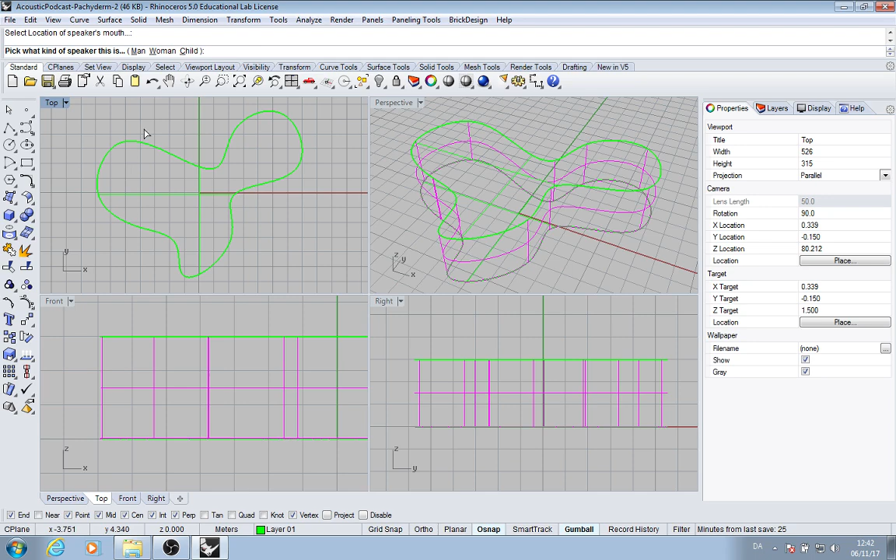So what we will do is again simply write insert in the command line, and instead of just the omnidirectional source we used previously, we will insert a speaking person. We're asked where is the placement of the mouth, and we insert that somewhere into our geometry, into our space. Man, woman, or child - let's say woman. And we can ask for different modes of speaking, or singing, or shouting. We say singing in this case.

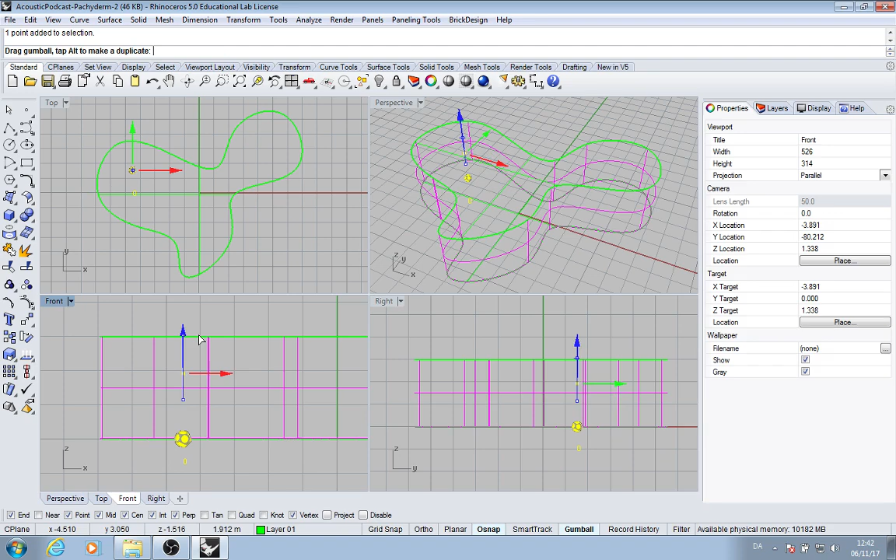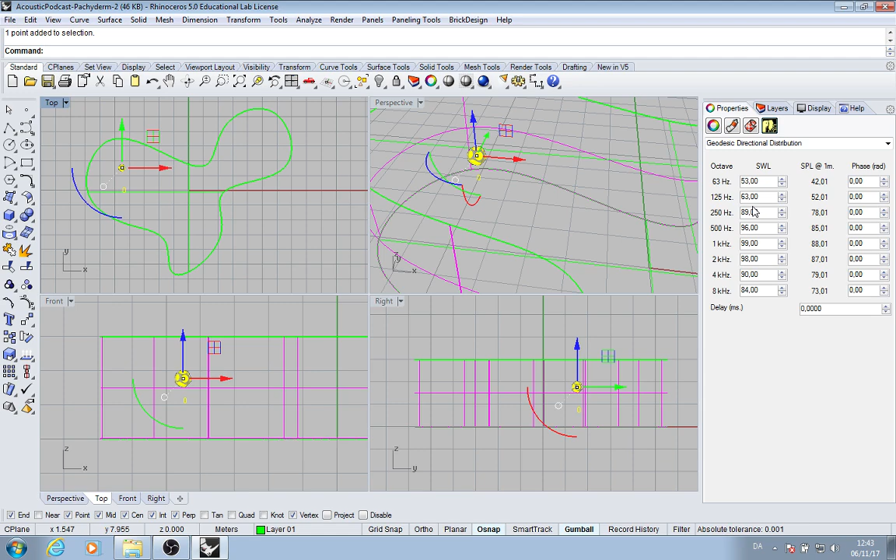Remember to move the position of the mouth to the correct height. When we mark the source now and go to the properties, we will be able to see a differentiated set of values on the sound power level emitted from the source at different frequencies. In the omnidirectional source, you may have noticed the sound power level at all frequencies was 120. Should you have more specified knowledge of your source, you can always edit these to set them to exactly the level that matches the source you're working with.

Then we will insert a receiver, or actually a series of three receivers, and they, as mentioned previously, can be marked, moved, and copied in the same way as points can.

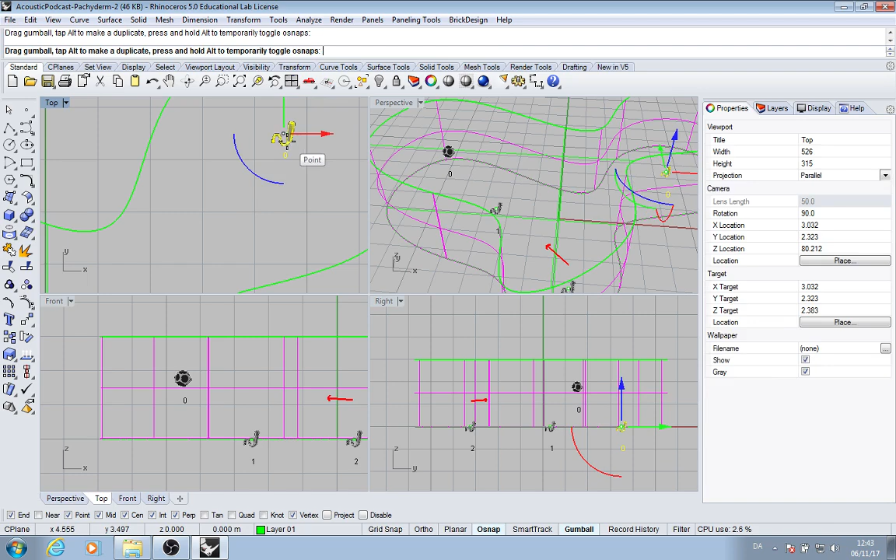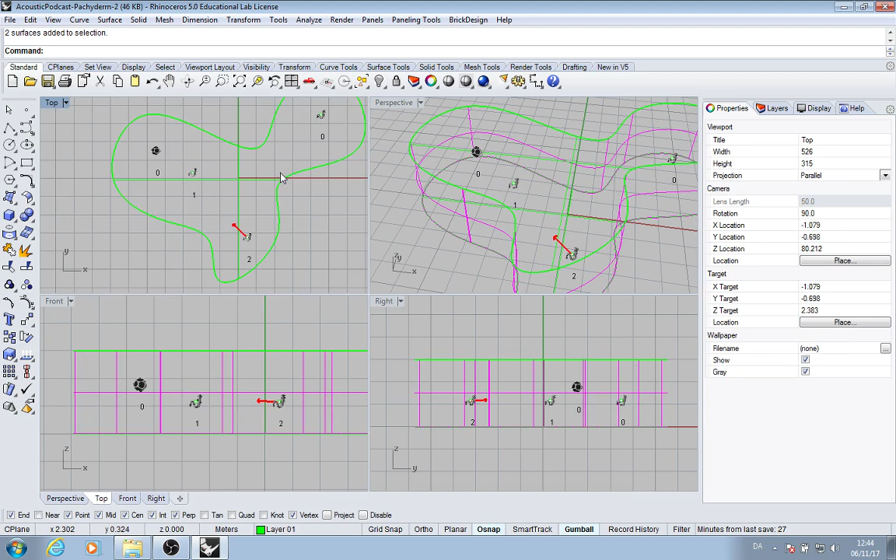So now we have receivers and sources placed in our model. We have checked that it's in meters and that the geometry of your space, your boundary space, is airtight. That means we are now ready to simulate and test the space.

And what we'll do, in order to not spend too much time waiting for the machine to finish the simulation, is a low order with just one reflection order of the image source solution. For the ray tracing solution, we'll keep it at 1000 rays, even though that's too little for the volume of this space. Checking the environmental factors, and then we simulate the acoustics of the space.

Again, we will see up here in the command line that Pachyderm is explaining how far along it is and how long until the simulation is anticipated to finish. It's casting, or calculating, the rays up to the number specified by you.

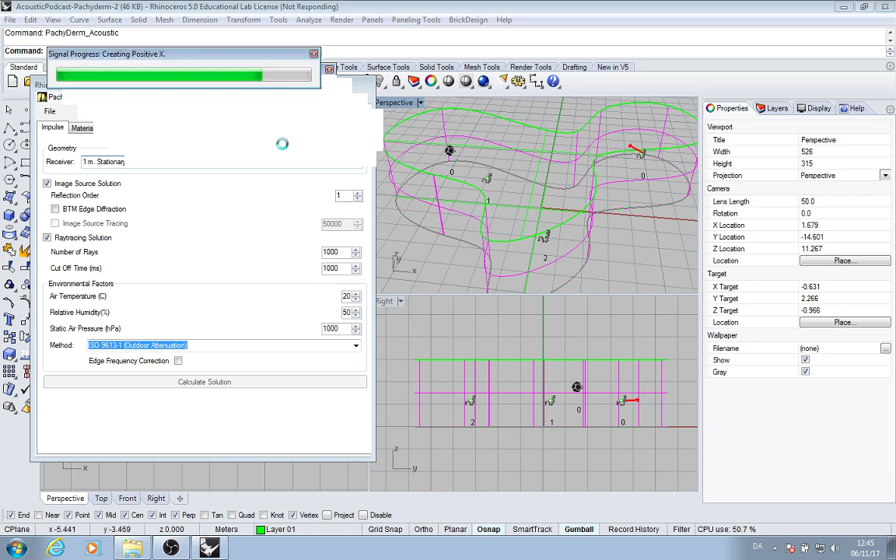And as it has completed here, we now have the possibility to go to the Analysis tab and look at the values that have been computed. What's particularly different from the last example is that on the receivers we now have three different receivers, and when we mark the different ones in the Pachyderm interface, we'll see a marking that shows which receiver has been chosen in your geometry, in your model.

So again here, if you look at reverberation time on T30, we can see that our reverberation time is approximately 0.8, 0.7. Let's just quickly check the different positions - they are closely matched, or close to each other.

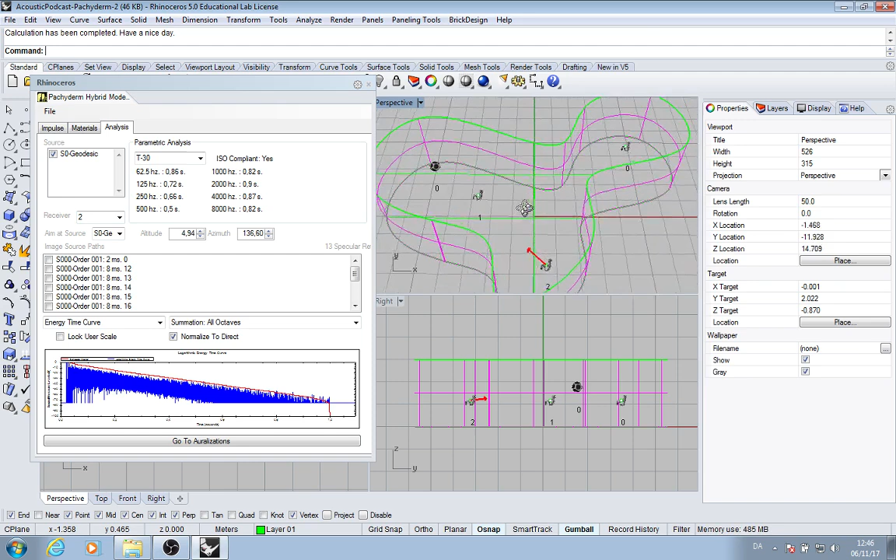That means our cutoff time is not entirely correct, but also not far off compared to the estimated cutoff time, which is based on 75 to 100% of the anticipated reverberation time.

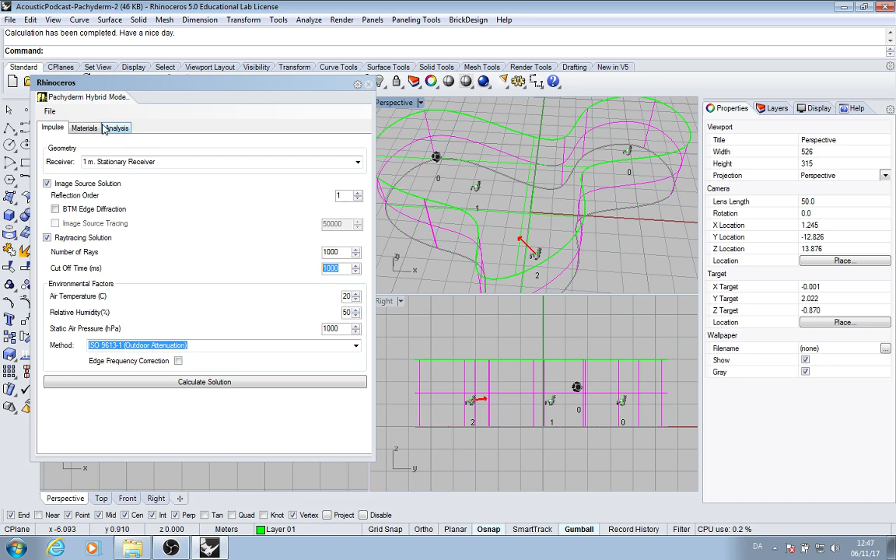Okay, but if you then move into and look, instead of reverberation time, at something like definition - which is basically the percentage ratio relationship between early to total sound energy at these different positions - then we can see...

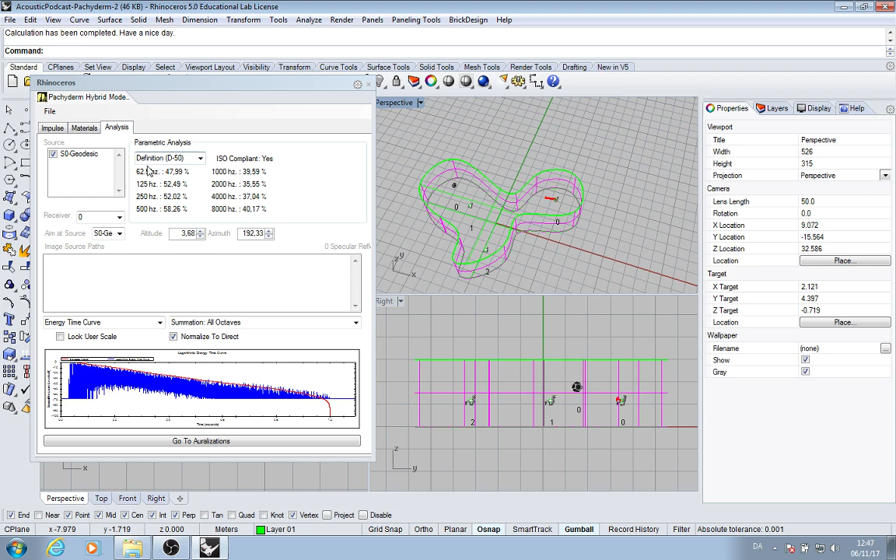In the more isolated space over here, we have a percentage which is relatively low. Normally we're interested in a percentage that goes at least above 50%, meaning we have a higher early to total sound energy ratio at this position, in these positions. In this case, we have too low a value in terms of assessing the space for speaking conditions, or for speech.

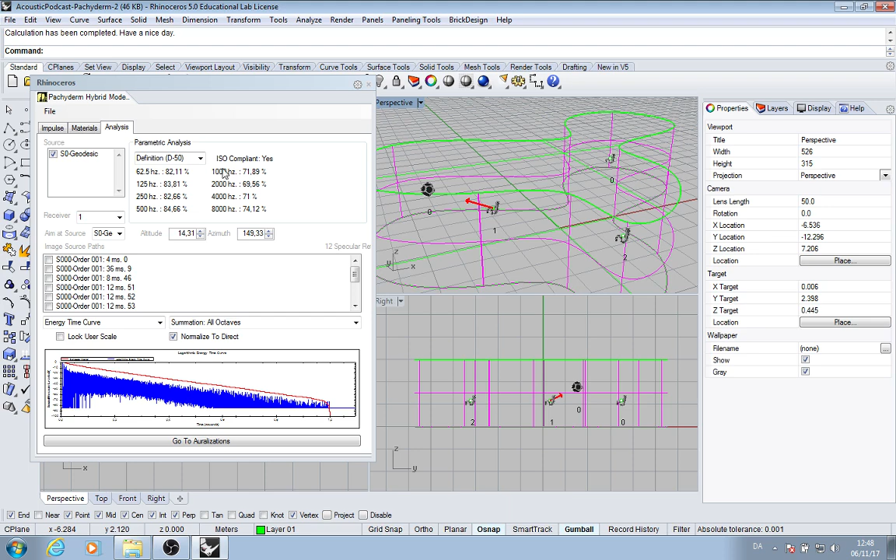If you then look at the positions right in front of the source, we have very high definitions here, which of course is natural, seeing that we have supposedly a lot of early sound energy arriving at this position compared to the total sound energy of the space. And the same goes for the position over here.

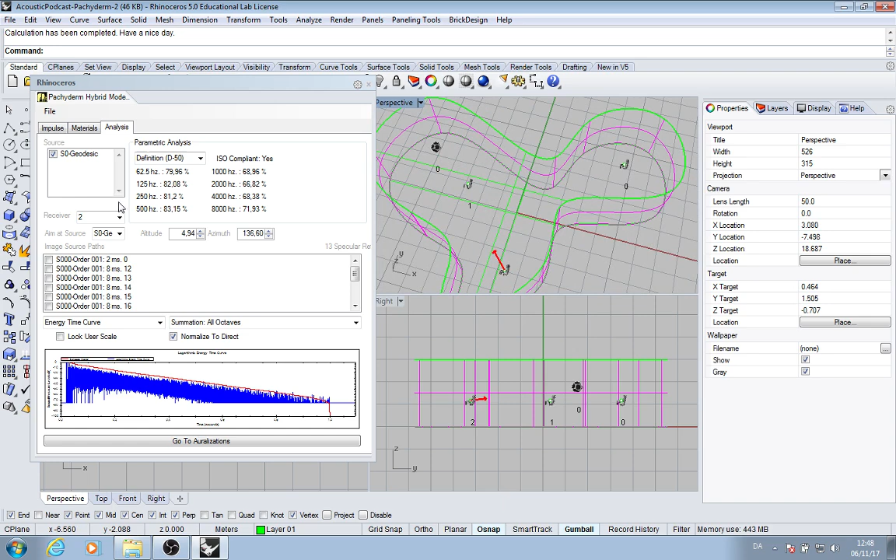In this way, you can start to understand the space acoustically through positioning several sources and several receivers, and specifying the source to a higher degree than simply applying an omnidirectional source.